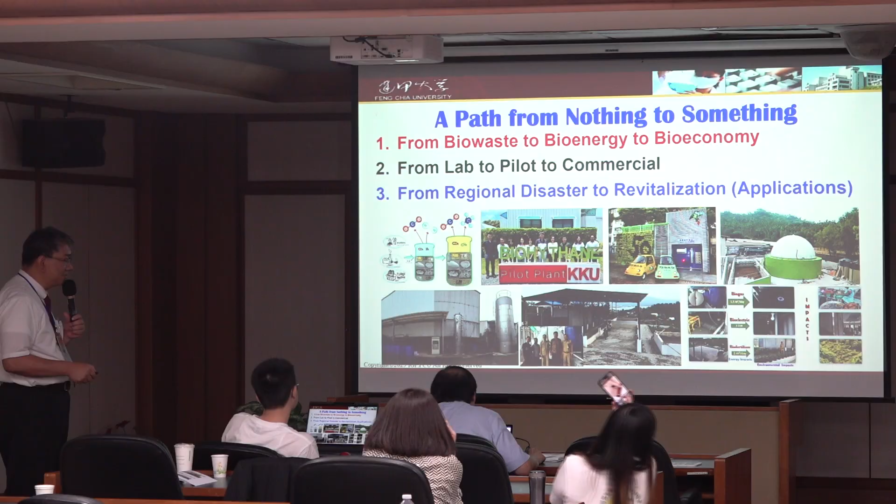So I will talk about the technology in Feng Chia University, from waste to bioenergy and to bioeconomy, from lab to commercial, from regional disaster to applications. You can see that I already have some collaboration in Southeast Asian countries like Indonesia. We have one pilot plant here, and we also have one pilot plant in Khon Kaen University, Thailand. And in Feng Chia, we have this small hydrogen gas refueling station.

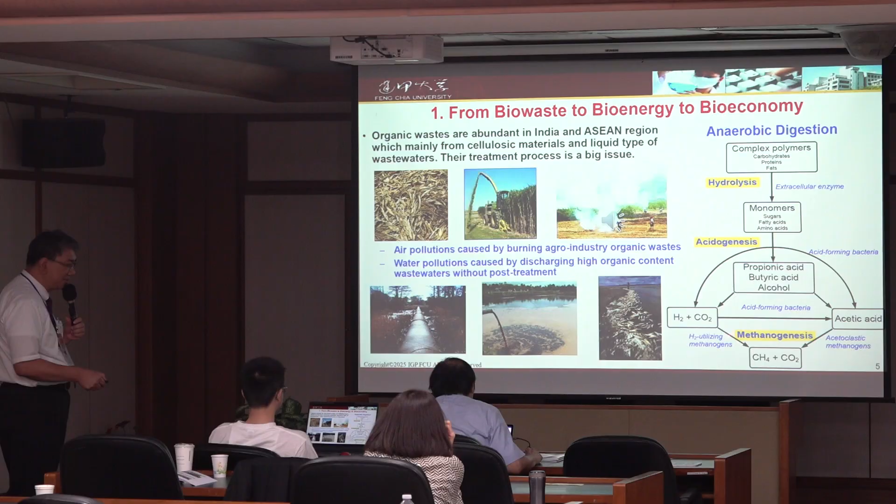And then we have a small, real size biohydrogen production system in one piggy farm located in central Taichung. And then this technology, like Professor Sayu already mentioned, goes from the complex polymer until methane production. Going this pathway, we also can produce hydrogen. So if we can produce hydrogen here and methane here, then we can increase the energy recovery. That's why in Feng Chia University, we try to involve the hydrogen fermenter before the methane production.

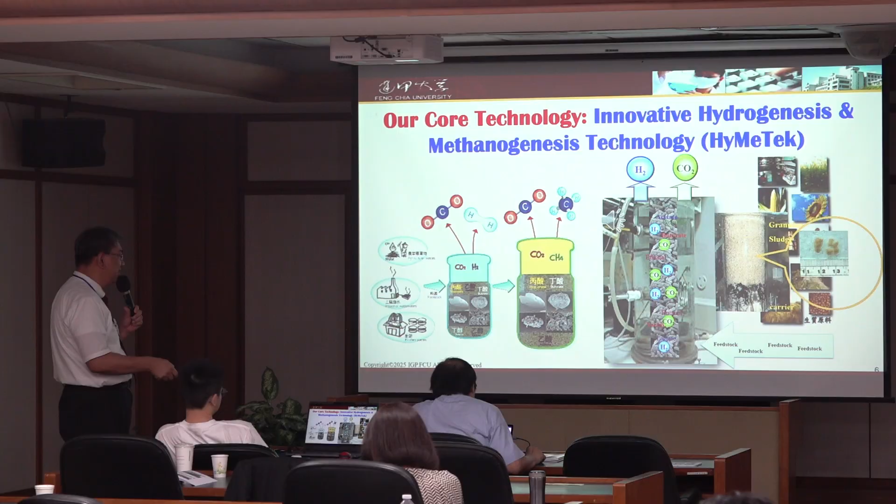So we can use all kinds of food waste and also bio waste. And then the most important thing is this bacteria. This bacteria has to be as fat as possible, like me, okay? If the bacteria is fat like me, then it will stay in the reactor. It will not overflow with the liquid, right?

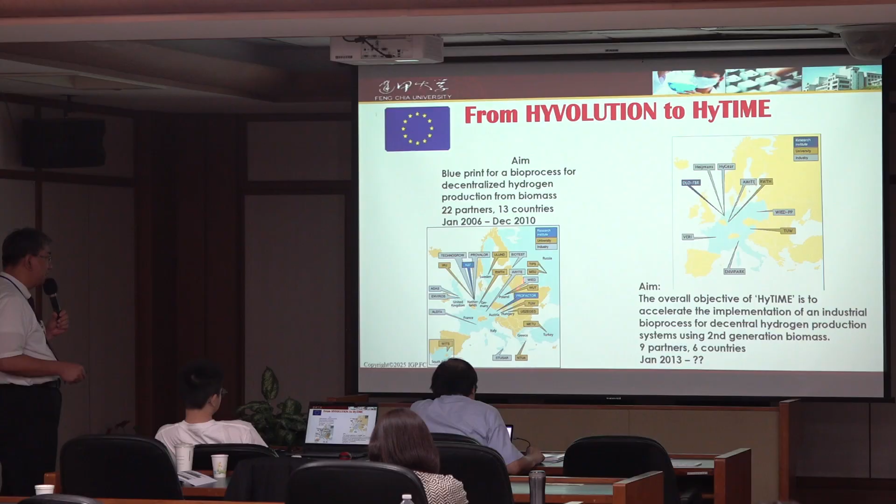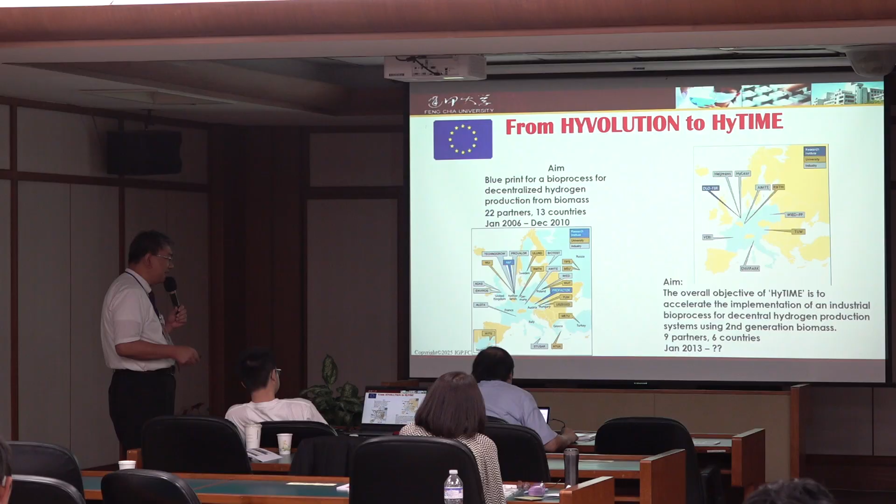And then this is the project in Europe with biohydrogen. A long time ago, 2006 to 2010, they had a big team in the EU, and they studied biohydrogen under the OECD and then IEA, International Energy Agency. They had one big project there. And then next, they moved to the HyTIME projects. But right now, I think this project merged with the fuel cell research team.

So why do we study this one? Because in Feng Chia University, we have some professors who study wastewater treatment technology, and we think maybe we can try to involve this kind of technology. We can make more papers and also process development, and then in the future we try to go to commercial like that.

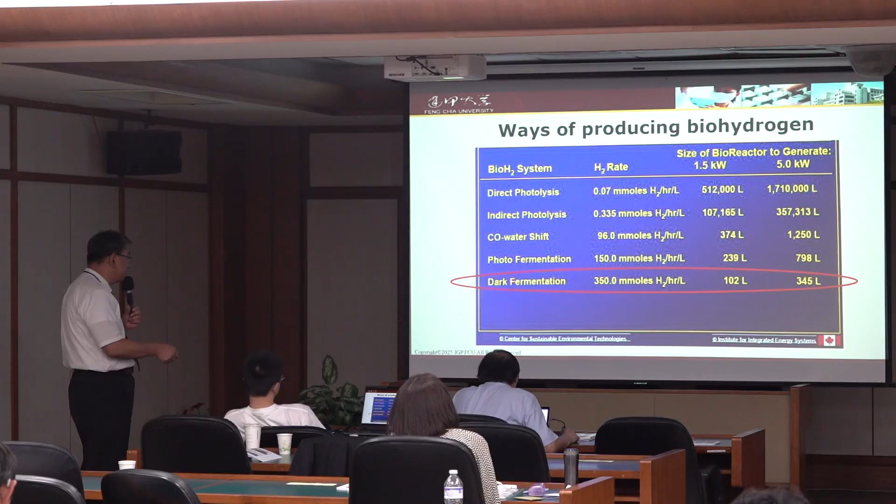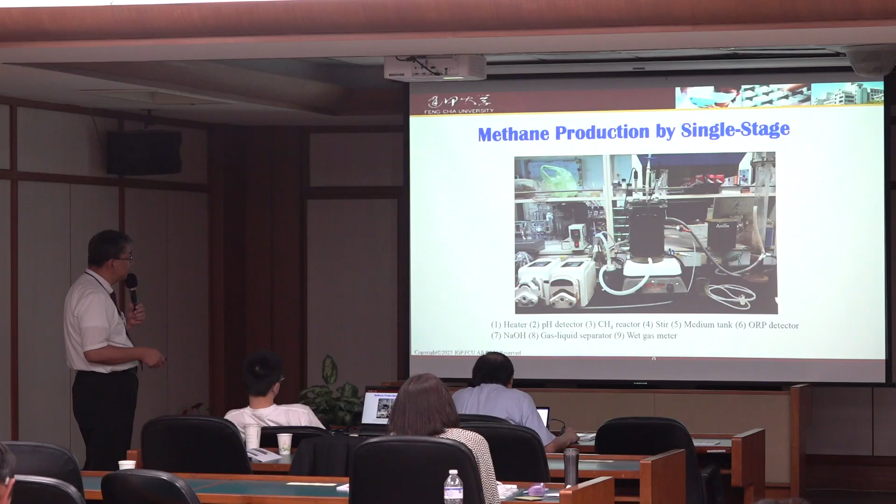So we find that dark fermentation is the best way to produce hydrogen. Then in the lab we study the continuous system, with the two-stage, right? The single stage produces methane, then we change to hydrogen and methane together. So as you can see, we compare the single stage with the hydrogen and methane production. Then the two-stage system can get the higher energy gain.

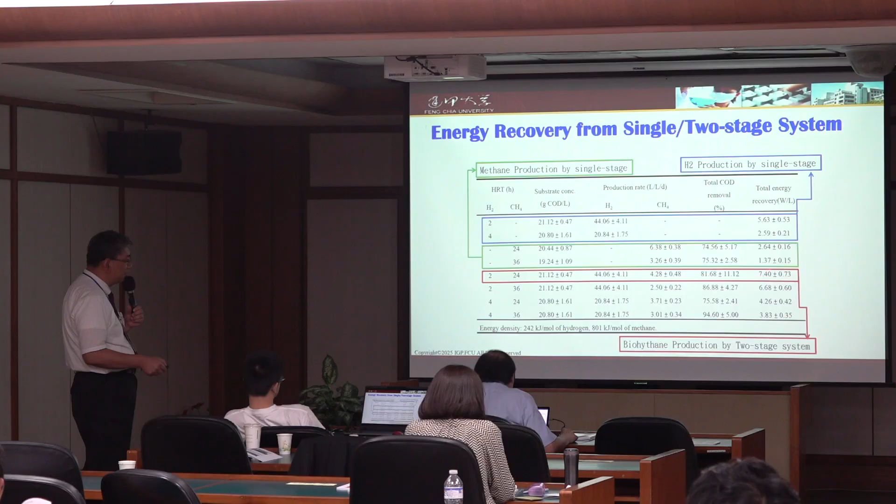So I think this is a good idea, but some researchers and professors in the world will ask why you produce hydrogen, because maybe methane is better. And if you produce hydrogen, you will reduce the methane production.

So some of the researchers, like my friend in the UK, Alan Guwy, studied the single stage and two stage, producing hydrogen and methane, compared them and found that even though we produce a little hydrogen, in the second stage they can increase methane production by around 12%. Oh, that's quite a good idea. Then we can merge the two-stage system with the hydrogen biogas production system.

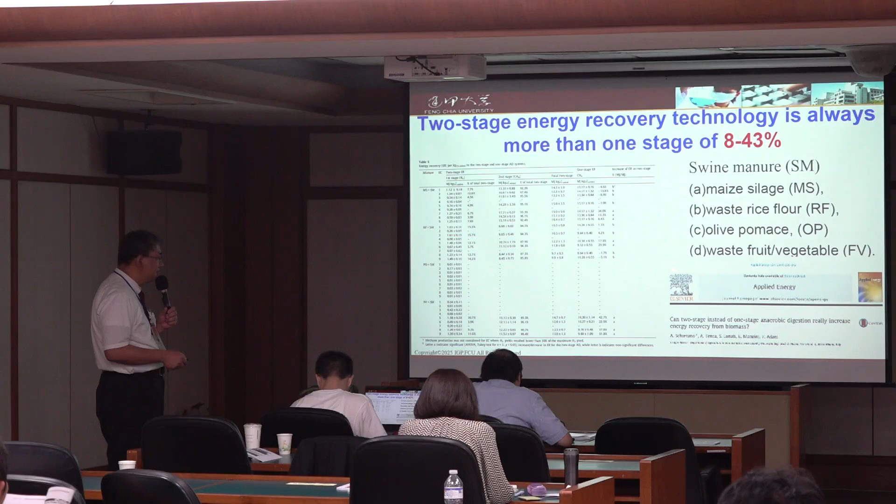So my friend Alan Guwy studied grass here, and then how about other co-digestion processes, like swine manure mixed with the waste rice flour or olive pomace, waste fruit and vegetable. Then my friend in Italy studied this and got the highest energy gain, around 8 to 43%. So normally, if we use the two-stage system, we can produce more energy.

So in Feng Chia, we studied this from 1998. My boss studied this one, not me, okay? I'm not so old. So I'm starting from here.

So for the scale up, I got involved at Feng Chia University in the continuous system and the high rate hydrogen production system. Then we got the highest biohydrogen production rate in the paper. And the government, from the NSC, and also our university, you are there, right? So they donated more money to our team.

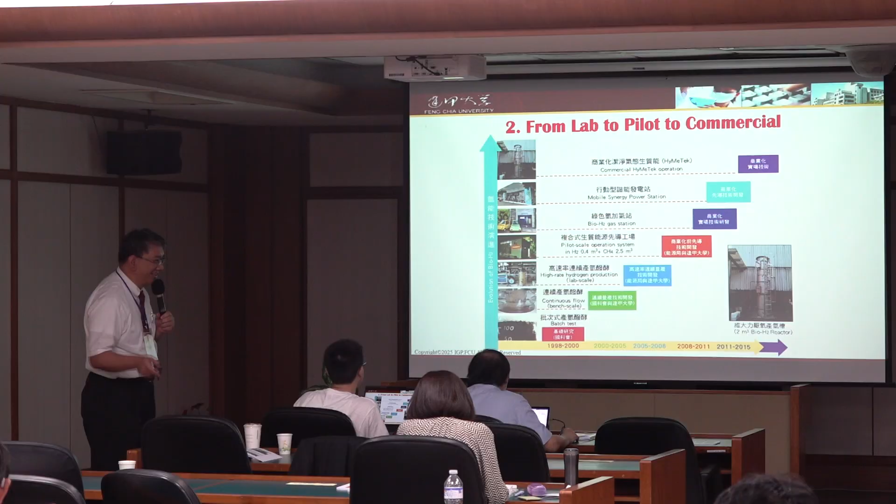So we designed this pilot plant with the hydrogen fermenter and also the methane fermenter. This is a pilot, I think it's the only one. Right now we run the two-stage system. And then we also involved a fuel cell car here. 10 years ago, we ran this one at Feng Chia University. Actually, we can make this real, but it cannot go commercial. It's still very expensive. So right now, we try to scale up the system.

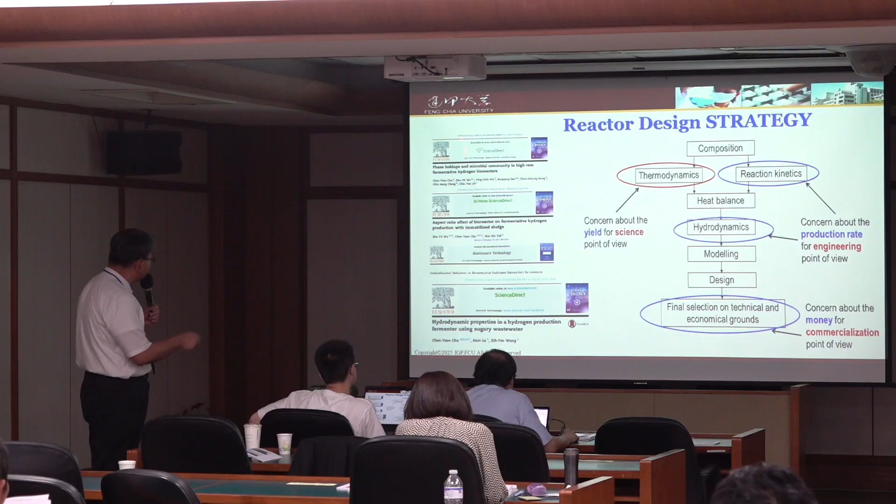Based on the scale up strategy, we have to study kinetics, thermodynamics, hydrodynamic modeling, design, and the final selection of the technology, from the engineering point of view, science point of view, and also the commercial point of view. So for this kind of technology, we published a lot of papers. This is a kinetic study and a hydrodynamic study. And then we have a gas holdup study. Then we move to the pilot.

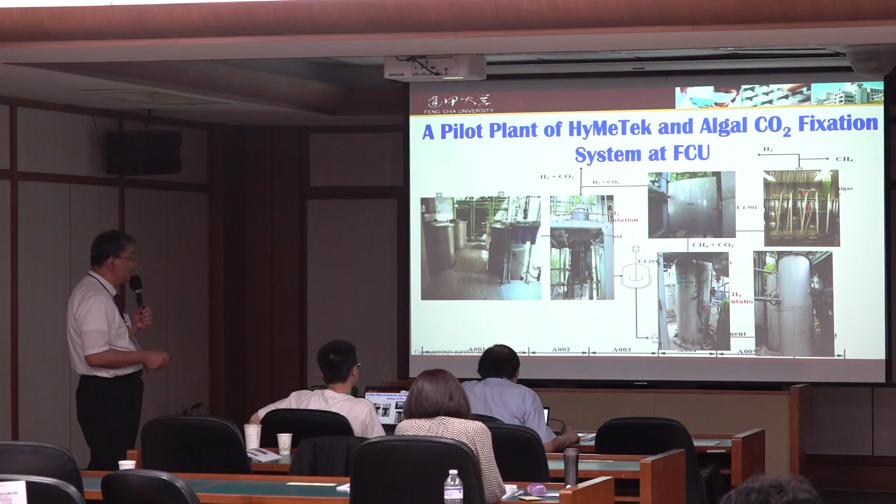So this is also set up at Feng Chia University. We have hydrogen production, methane production, then fixation by the microalgae system. We can get pure hydrogen or methane, depending on the technology. So this is inside the hydrogen fermenter and methane fermenter. And this is the outside view. This is 50, right? Feng Chia University is already 63, right? It means this was 13 years ago.

We ran this fuel cell car. This is fuel cell university. Oh, no, Feng Chia University, okay? This is the Feng Chia University biohydrogen car. We use this one, and 6 bottles of this kind of hydrogen canister can run this car around 150 kilometers. So it's quite good that we can demo this, but until now, we're still not going commercial, because this system is still quite expensive.

So this is Professor Lee, right? Dr. Lee is a former president. Actually, at that moment, he was the vice president, not the president. After he came to this ceremony, he became the president. But right now he's already the former president.

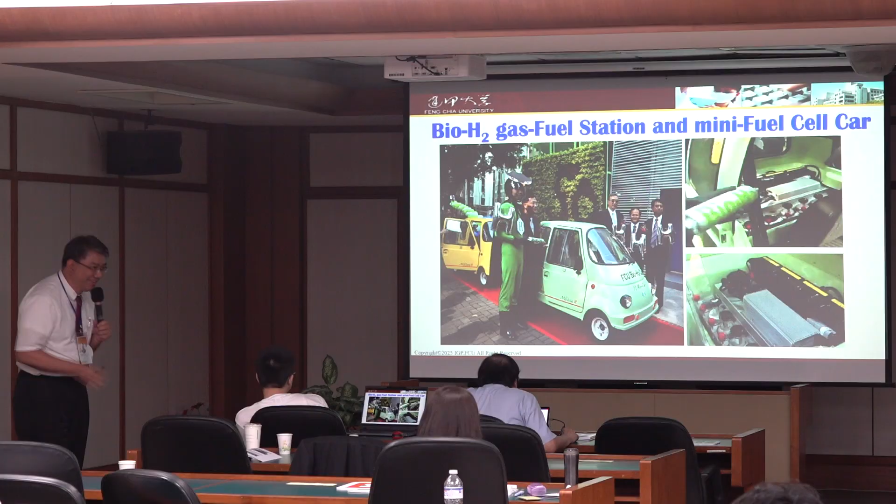Okay. And then we have the commercial system, located in central Taiwan. This is the hydrogen reactor, and this is the methane reactor. We also have hydrodynamic modeling for the 600 cubic meter bioreactor design. So this design was made by Alice, who is over there.

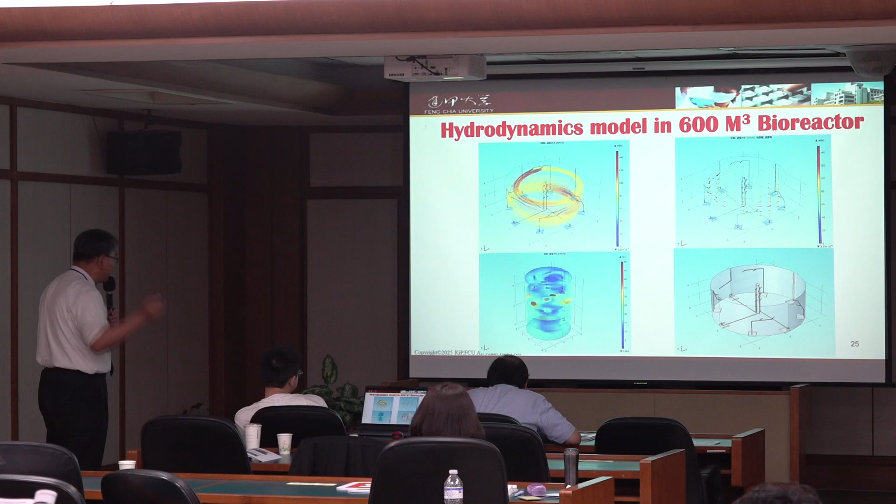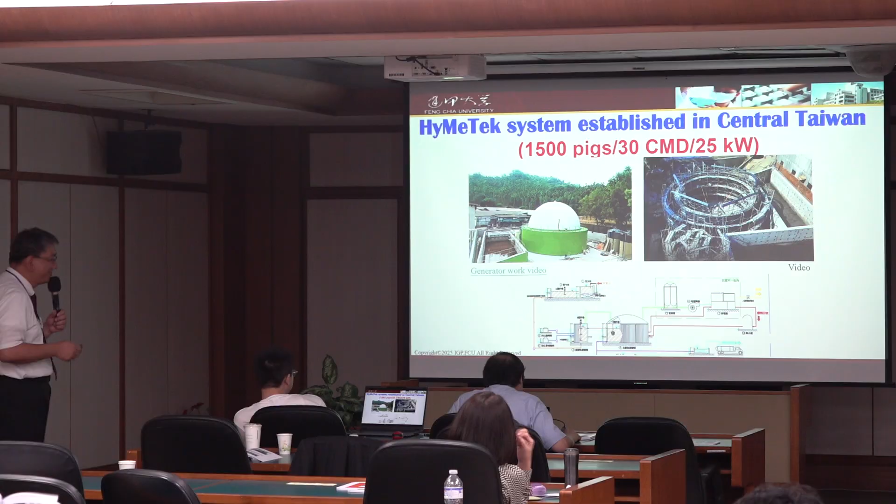And then we designed this one for the process design, starting from 0 to 1, okay? So this is a detailed design, and then we try to merge the hydrogen and the methane in the piggy farm. But this is still small, right? Compared to the Germany size, this is still a toy, okay? It's still a toy, but we try to do this kind of technology, so I think it's okay.

This is the bird view. We see hydrogen and methane, but this is from the wastewater treatment in the pig farm. And then we use this kind of idea. We go to Manado city in North Sulawesi, Indonesia, because I met the vice governor in the APEC meeting. Yeah, I think Dr. Wu also joined this meeting in Wellington, in the APEC EWG 54 meeting.

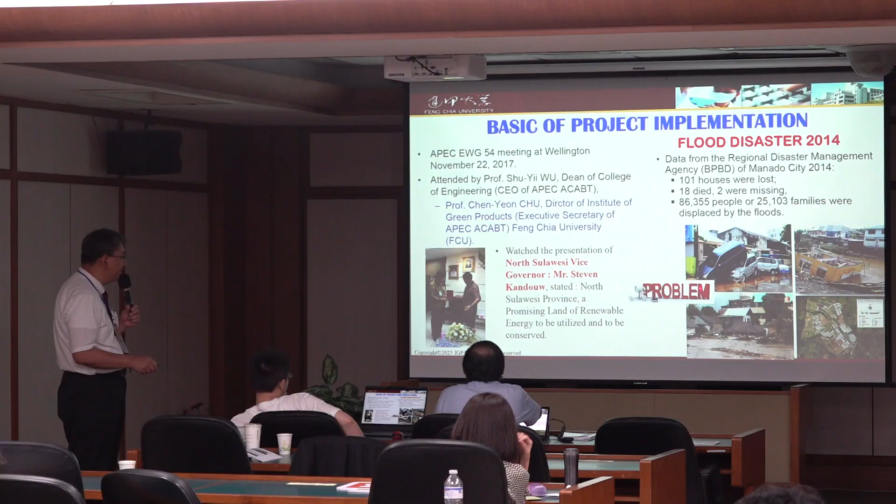Yeah, so we met then, and they faced a very big problem. In 2014, and then after that, Steve invited us, me and Dr. Wu, and then we visited North Sulawesi. Then we try to involve this kind of technology in this small village, because they relocated the people to another small town, and then we try to give a small electricity and also the gas to the small villages.

So we selected this location in the slaughterhouse in Manado City, so we can produce biogas, bioelectricity, and also biofertilizer. And we try to make this one become an education system, an education park, and then we can impact the community, like Professor Sayu does in northern Thailand.

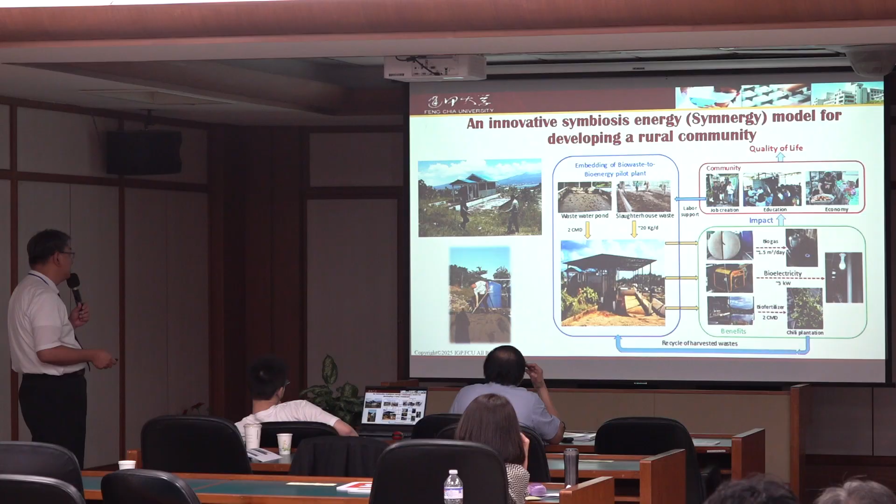And we make this one, and we not only produce gas, we also have the biofertilizer. They use the fertilizer for the chili plantation. And then we use the solar panel to dry these chilies and make them into powder. Because in Indonesia, if there are no chilies, they cannot eat food. So the chili is very important, and they can get a high price in the economy.

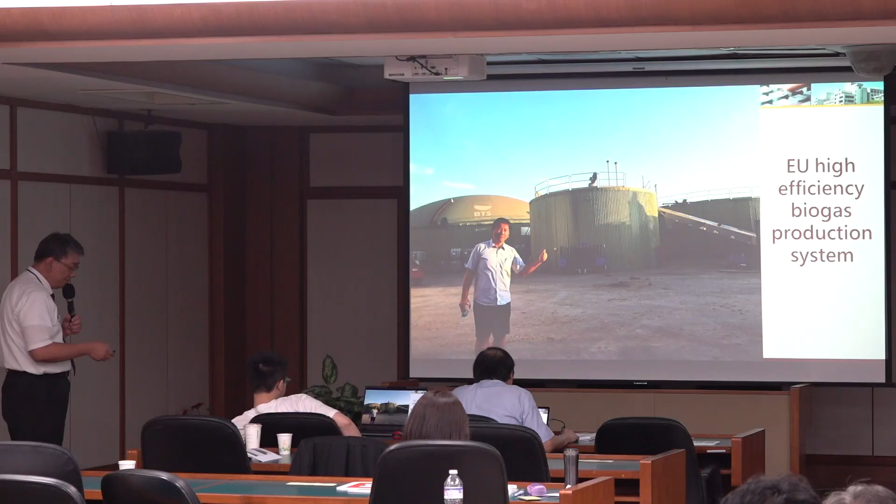Okay, then I visit Europe a lot, and you can see this. Europe has a high-efficiency biogas production system, like Professor Hans also talked about. Then maybe we can involve Professor Hans' technology also. So this one, you see, we make some collaboration with the university. This is my student, and many students visited Dr. Hans' university.

So they can use the full-scale system to do the research, but we cannot do that because it's very expensive. Yeah, so maybe we can ask Dr. Hans to send the full-scale system to Feng Chia. We can try to set up this one, set up by Feng Chia University. And then I also asked the former president, said that maybe we can invite Dr. Hans as the lecturer in Feng Chia after he retires. Okay, if you agree, then please move to Taiwan for the lecture, okay?